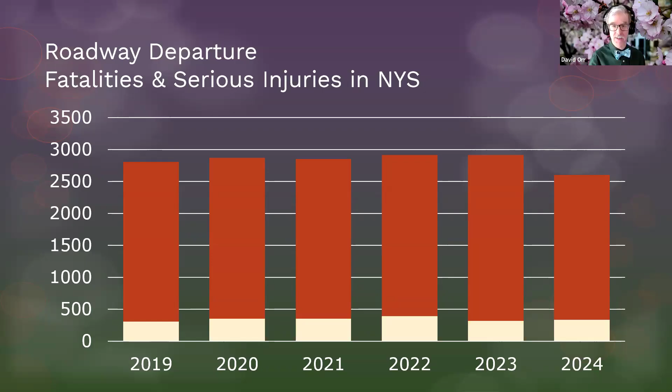Now the roadway departure concept comes around, there's three ideas involved here. We're going to keep the vehicle on the road, okay? That could be done with stripes and keeping the lane widths where we want them, and good signage. We've talked about some of those.

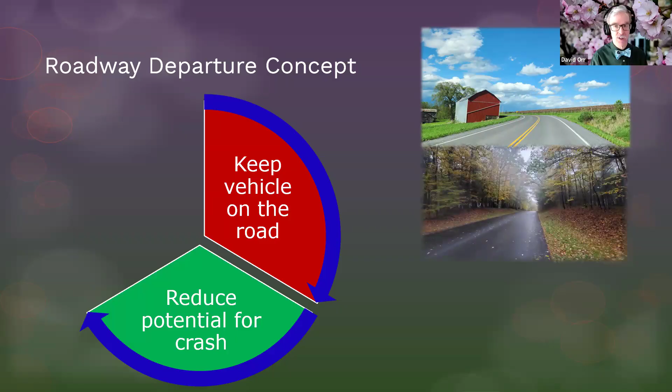We're going to reduce the potential for the crash. We'll have some examples today where if you do leave the roadway, try to keep you from actually hitting something. And then finally, if you do have a crash, make sure that crash has low severity, including things like breakaway hardware and barriers. We'll talk about a lot of those today.

We're also going to talk about local road safety plans for the last bit of this webinar, just because it's such an important characteristic and it's part of the roadway departure local call for projects. If you have any questions about this particular call, make sure you contact the DOT. Andrew Sattinger can answer those questions for you, either a phone call or an email. But really, you want to go look at the web page. There's a lot of very good information there, including some of the data viewers on the plans itself and some of the ones I'm going to mention today.

Now, in terms of the funds, if these funds are being released through the Highway Safety Improvement Program, or HSIP, they're only for local roads. So it has to be a town, county, village, or city road or street. If you're in an MPO, you'll go through your MPO for this, but the key is it's for local roads.

There's $90 million set aside, and 10 million of those 90 million are set aside specifically for developing a local road safety plan, which is why we're going to spend some time today reminding you of some of the aspects there. Now, all of these are due on June 13th, so you've got plenty of time, but you do need to start getting all your paperwork in place, and you need to start getting your costs in place, okay?

Now, in terms of what proven countermeasures are eligible, well, if they're part of the hotspot series that's inside the roadway departure safety action plan, you're golden. If you're part of the emphasis areas in the systemic safety that the state did when they reviewed their own road system, you're in good shape. If you have your own local road safety plan, you're in good shape. And even if it's just a proven countermeasure from the list we've been going over, you're actually okay.

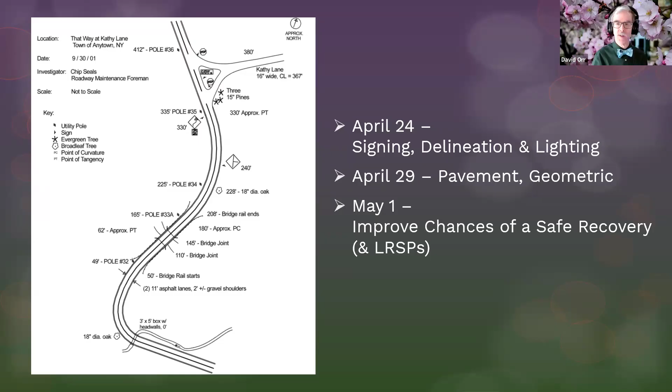Before you do anything, make sure you have a good inventory, whether it's done by an old hand-sketched map like was done by Jim Markle when he worked here, or whether it's done with a GPS and all the fancy tools we have today. I don't care, but have a plan so you can start focusing where the problems are going to be occurring. Now, for each of these different countermeasures, I've gone through and I've sort of marked them out based upon the concepts in the roadway departure concept.

And then what kind of crashes are we talking about? Are we talking about really working on head-on crashes, which we don't like, rollover crashes, hitting fixed objects on the side of the road? And are they more effective at night versus the day? And of course, we also want to look at curves versus tangents. We know curves are a major issue.

You'll see a check mark with the primary. Those get a little higher emphasis, but you may consider any of these things that we highlight, and you may have arguments for going beyond what I'm going to show you.

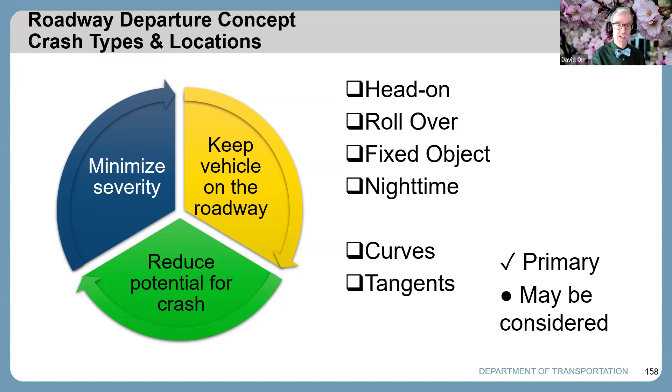So let's get started with breakaway supports. We know they reduce the potential for a crash. They're usually placed inside the clear zone, where they're holding up signs. Even utility poles can actually have breakaway, though we don't use them very often. We know that a lot of light poles are frangible, can be struck. The idea is so we get rid of the idea of a fixed object. We don't make them fixed anymore, and they're much more applicable at curves because people tend to run off the road more at curves.

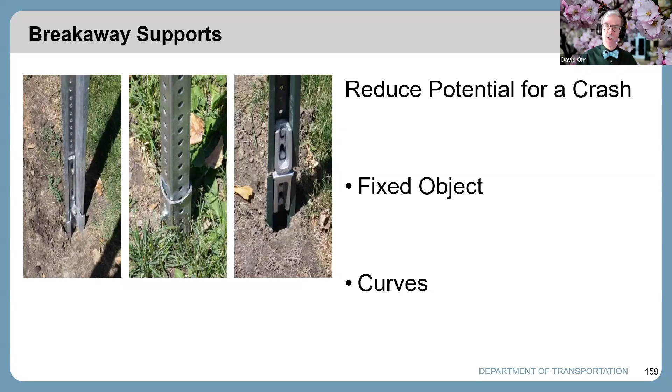So, just to illustrate this, this is a small car. They like to test small cars because that's sort of the worst case scenario. And this is a single post. It's actually a 2-inch pipe. We don't use pipes for a reason, and here's why. Yeah, that's a bad day. That could lead to a serious crash, kind of injuries that are life-changing. Small little car. So we really want to be looking at good breakaway hardware.

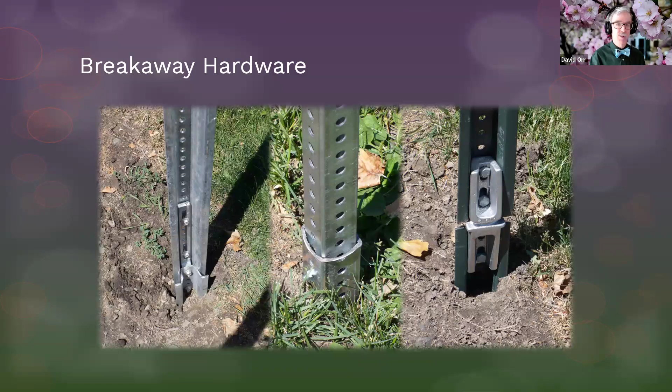Okay, and there's lots of choices out there for breakaway hardware. So I'm just going to ask and get you to raise your hands. Raise your hand if your agency currently uses breakaway hardware regularly. It's in your standard operating procedure. Okay. Good. I'm glad to see you.

That's good. It should be anything you're putting up should be breakaway. There's two reasons for that. One, even on what you think are those low-speed roadways, it can be very effective. Two, it's required on anything 40 and above, based on MUTCD requirements. So, keep that in mind. There are some times when there's requirements involved. It can actually help make it easier to install the signs because you can do the ground post and then apply the breakaway hardware and attach the upper post.

Tons of choices out there. But look at other items on the roadway, not just your signs. Look at your mailboxes, okay? Gang mailboxes are one of the most dangerous things we allow on the side of the roadway. There's good reasons to have a mailbox there, but boy, this car is having a really bad day.

It's that same kind of small car. They go through them and where they test these things. I've seen them in Texas. They're pretty cool to watch. But that'd be a really bad day. Okay, that would certainly be a serious, if not fatal, injury.

Now, if you're wondering about mailboxes, what you can do, they actually make a support for the mailbox that comes out. It's got this sort of teardrop shape to it. And then if a vehicle hits it, it actually flops on the hood and pushes off to the side. It's actually very effective at keeping it from getting into even a small car. So that's something you might want to think about requiring for mailboxes. Don't let people put those fixed object mailboxes. Nice brick looks nice, but boy, it can get you in big trouble.

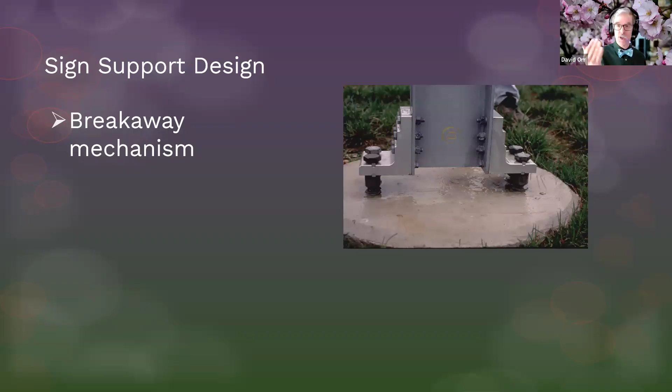Make sure you've thought about the design of the sign support. What is the breakaway mechanism itself? You can go high end. This is actually for a really large one on the interstate, which has a hinge system usually with it. A lot of times there's a hinge that goes up partway, so a vehicle literally goes under it. I'll show you a video of that in a couple minutes.

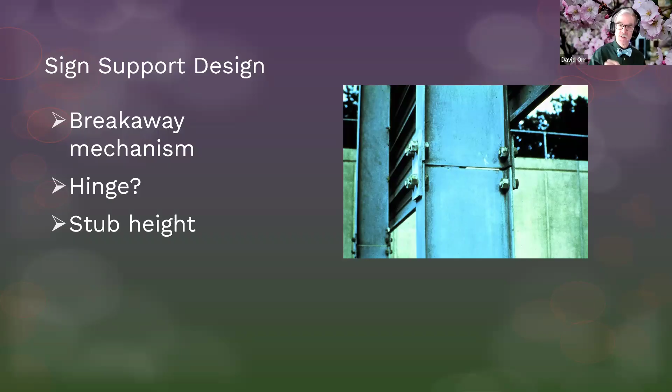Think about the sign support, think about the stub height. The maximum height something should be above the ground for a stub is really only 4 inches, and that's over the length of the car, so it's really 4 inches over 5 feet. If you've got a stub above the ground, that stub could still snag a vehicle as it drives along.

These concrete anchors are too high. They put in a nice breakaway system, but if somebody were to drive down and hit this, and it'd be very likely because it's right in the ditch line, they hit those, they're actually going to have a problem. They can actually be more dangerous than if they hadn't anything at all. So think about your stub height, nothing above 4 inches, okay?

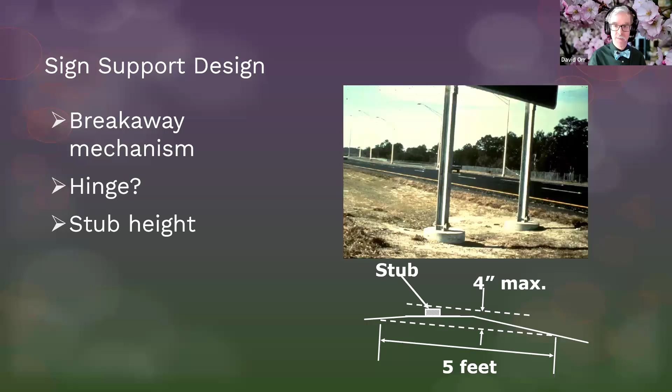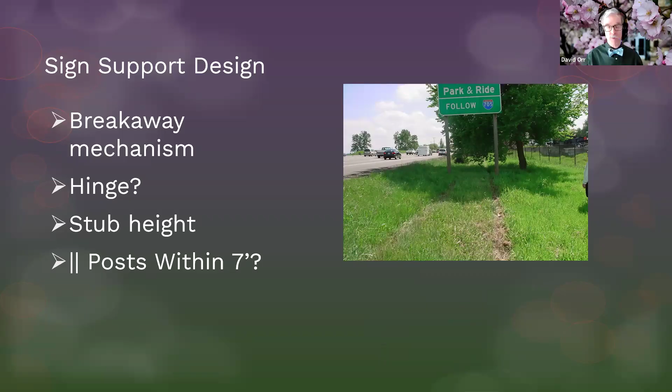If you're putting up a posted system, let's compare a wooden post. If they're closer than 7 feet apart, you may need to think about your breakaway hardware. There are standards and requirements for this. If you've got multiple posts, be very careful about things that are essentially a vehicle hits both posts, it's a lot more dangerous than if they only hit one. Keep those things in mind.

So I'm going to have you put it over into the Q&A for me. What issues do you see here? Give me, what do you see the problems here? There are actually three that you might put in there. We'll see if you catch two of them.

The ground posts are way too high. Yeah, that's the easy one, everybody should get that. Let's see if you catch the other one. The bolt spacing, yes, too many bolts. It's actually not breakaway hardware. Breakaway hardware usually consists of two bolts or a strap system that are specifically designed to handle being hit.

In fact, I'm going to go back and show you. You can see the one on the left is a strap system, the one in the middle is just a single bolt system, and the one on the right is a shearing device. There are specific standards that are out there.

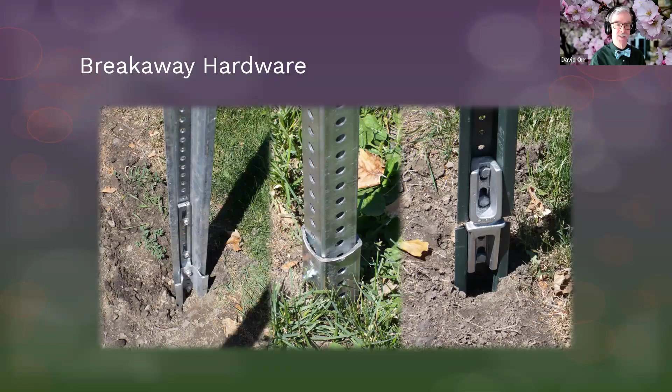Something called MASH, and we'll come back to MASH in a little bit. But yeah, you guys did a good job. By the way, the last one, you might be able to use one post. This particular picture, it doesn't show, but this is actually facing against traffic, you could have a problem. If it's facing with traffic, that's okay. You want the post to fail in a particular way. And of course, the post spacing is way too close to each other in a lot of ways. So be careful about these kind of things.

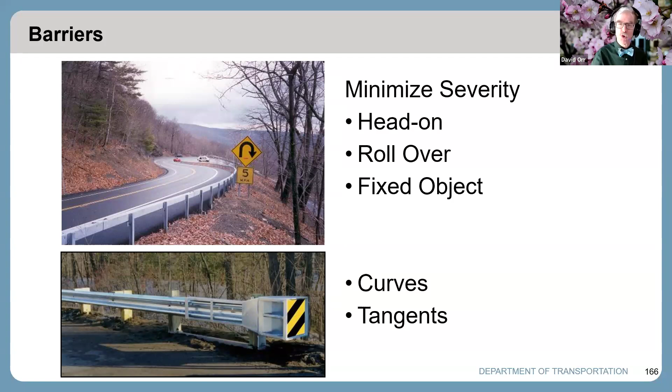Now I want to spend a good bit of time on barriers, i.e. rail systems. The goal here is we're trying to minimize the severity of a crash that does occur, so we want to reduce the head-ons in some cases. It actually can help if you do it right, and we'll show you why in a minute. It can certainly help with rollovers and fixed objects, and the terminal ends are absolutely critical. We know they work on both curves and tangents.

So a pretty easy one, I'm not even going to ask you to raise your hand. I think everybody can agree that this is a location where you need guide rail. It would be really hard to do the other steps involved to get rid of the need for guide rail. But let me ask you here, raise your hands, do you think you need guide rail here? Do you think there's something else you could do instead?

Relocate the object. You can't do that with the culvert, but maybe you could move that utility pole if it was too close to the roadway. You could reduce the impact severity - that's where we were talking about the breakaway systems that are out there. And then, and only then, should we think about shielding things.

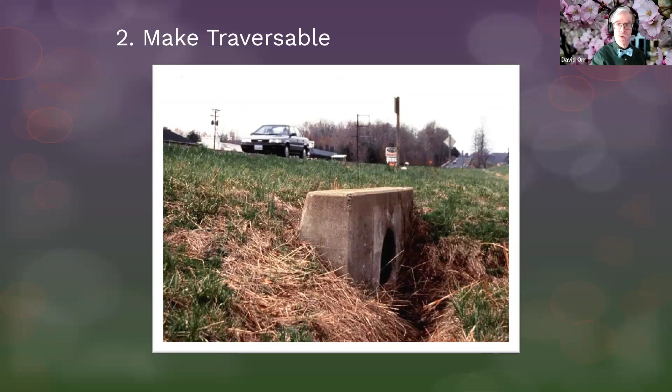This is definitely not a traversable end - this is way too high. If you were to have that flush with the ground, it might even be removed completely if you had it short enough. But make it traversable.

Now, we talked about slopes last week - we know how difficult that can be, especially with right-of-way issues. But, excuse me, Tuesday, I'm getting my days all mixed up. But think about making things traversable.

Any culverts you've got, especially your driveway or even cross culverts, you might want to think about putting something where people could at least drive up and over it. If they went down this ditch and hit this rail and this rebar grate, they're probably going to have a property damage crash. They may even have a minor injury, but they'll roll up on top and therefore they'll at least have a minor injury at most.

So you'll want to think about that for especially your cross culverts and even your driveways. Anything that's above 36 inches, and you've got a flared end that's over 36 inches, you're going to want to think about doing something to make it traversable.

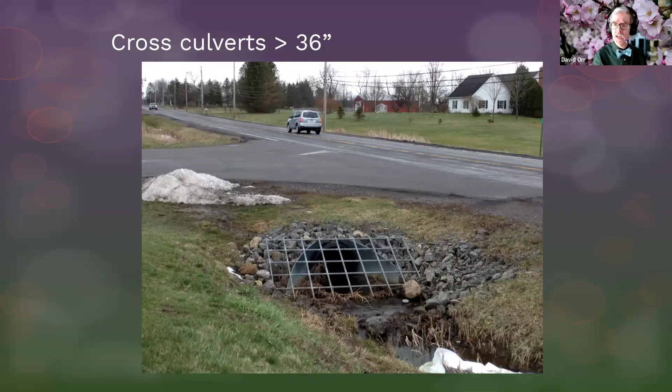If you do have to have something in the clear zone, like mailboxes or signs, make them crash worthy.

We've already seen the single vehicle hitting a single post, but think about what other things you can do. That's why we're a big fan of looking at breakaway hardware. There are lots of choices out there, and like all of these proven countermeasures, there's a lot of overlap.

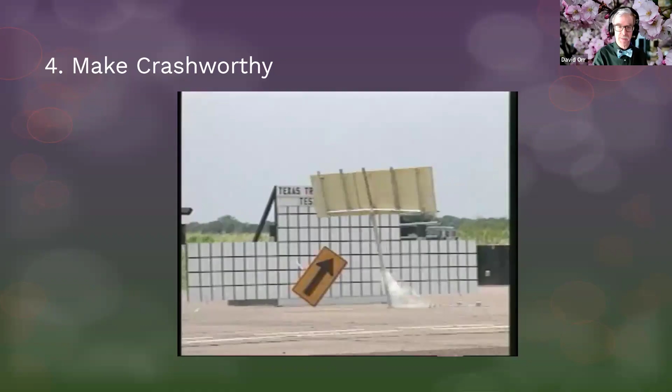Here's a successful slip base test. Now, I don't see a lot of slip base on the local road system, I understand that — this is more of an interstate level kind of thing. But if you've got high volume, high speed, you might want to think about it. A simple system, a single bolt or two bolt system, in this case U-channel — see, it did its job.

Though in an urban area, I like the strap systems, because you don't get a flying sign.

Now, in terms of hardware testing, both for rail systems and breakaway hardware, we used to use something called NCHRP 350. You may have read about that, but it's been superseded by MASH, the Manual for Assessing Safety Hardware. It first came out in 2016, and I know they're working on updates to it. The key is there are new testing requirements — slightly bigger SUVs, small cars are still small cars, and more angles, more speeds to make sure things are safe.

Now we're going to talk about shielding — we're only talking about shielding now. We try to do everything else first, and we'll come back to talk about specific rail systems in a minute. But shielding is after you've checked and looked at everything else. And if you can't do that, you're going to want to delineate, but make sure the delineation is pointing in the right direction.

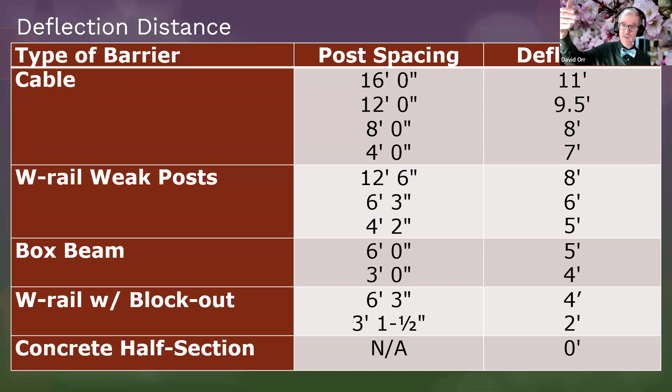You can get the deflection from 11 feet down to 0 feet. Okay.

But just ask yourself, I'll bring the chart right back up, and I'm going to start a poll here. What is the minimum deflection distance for W rail weak post? Okay, I'll let you put those answers in.

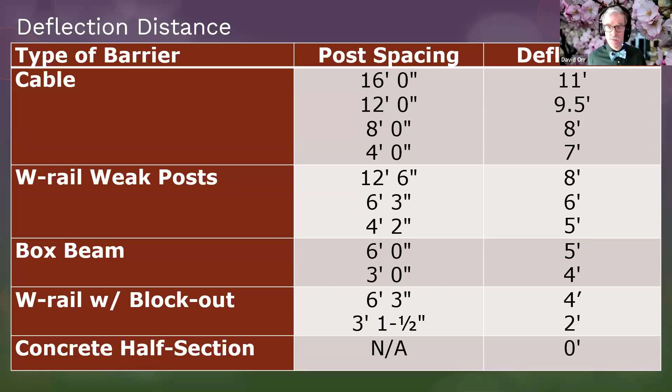And hopefully, yay, everybody got 5 feet.

Somebody asked in the Q&A, how are standards changing given larger, heavier vehicles and heavy EVs? The larger, heavier, that's actually already incorporated to some extent in MASH. That takes care of quite a bit of it. These rail systems can actually handle buses and trucks. They're actually testing for some really large vehicles. The biggest issue we're going to see with the EVs is probably going to be with cable systems. They may have to retest those. The standards haven't changed yet, but there may be some changes because of lower center of gravity, and the cable systems aren't interconnected. But the heavier, I wouldn't be as worried about.

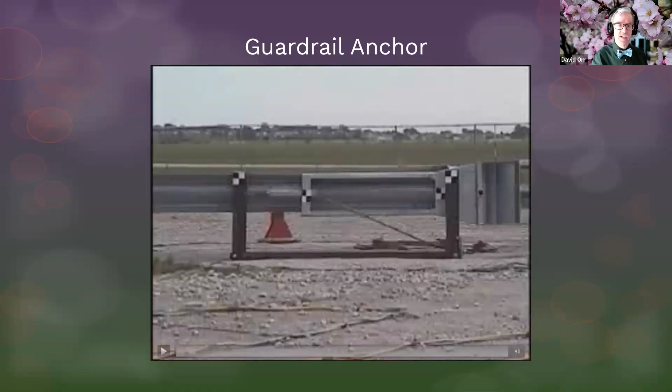And those end treatments can be energy absorbing. They can be the kind that fail when it hits within a certain distance. The anchoring is absolutely critical. We don't want those old spears out there. Now, if you look carefully, watch when the vehicle hits. If it hits beyond that second post, that combination of hardware actually means everything beyond that point works.

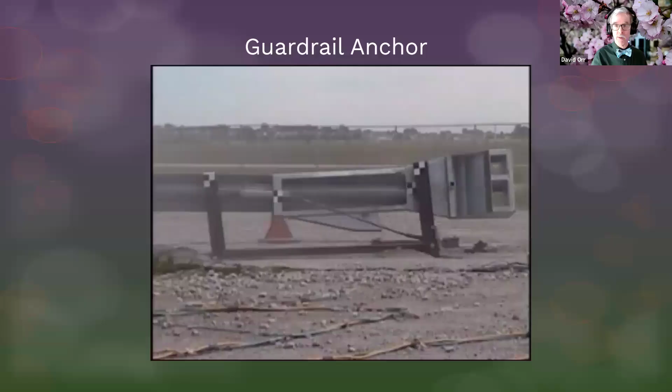Okay, now you can see there's a lot of energy involved. You're going to have to fix things, but that rail system is doing its job as a big rubber band for that truck that hit it. And those guide rail anchors, well, they really work.

But the terminals really do matter. The transitions matter.

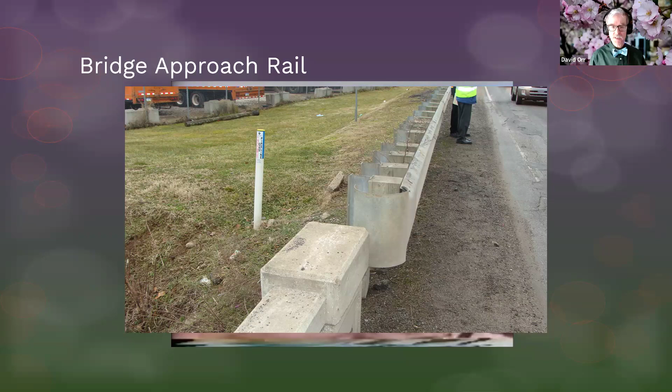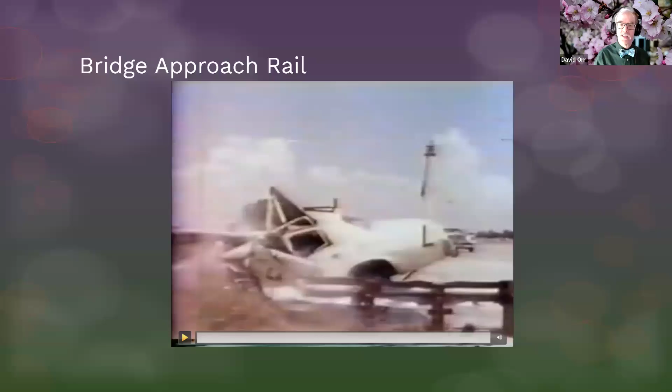So you want to think about upgrading your hardware. This would be a perfect opportunity, and it is a proven countermeasure to improve your transitions. Make sure your bridge approaches are right. Get rid of old, antiquated hardware. Put up proper barrier systems.

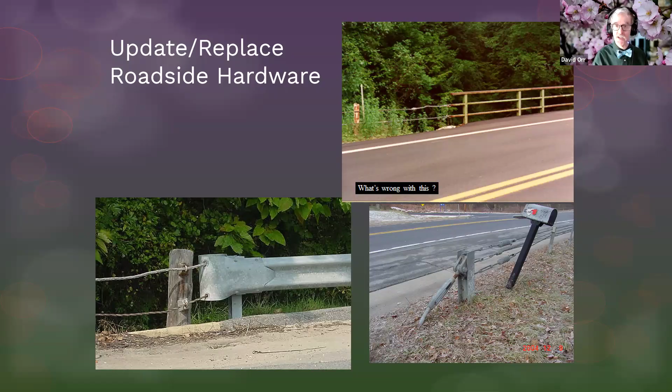So let's ask you a couple of times, and then we'll move on to local road safety plans. What would you do here? I'm going to open up a poll, and I'll leave a picture on the bottom right to remind you. What would you do in this particular case? I can think of about 3 or 4 things you might want to think about.

Absolutely, replace that boxing glove terminal. You might need to remove some trees — there might be trees within the deflection distance. You might need to extend the rail, you might not. Obviously, for a single photograph, it's really hard to know exactly what to do. But as a minimum, a proper end, you may need to upgrade and check the deflection distance. Whether you use an energy absorbing system or a breakaway system depends on the site, but these are things you might want to think about.

You might want to flare it back and offset it a little bit. Again, think about it. Oh, I like that — reflective tape. They actually make delineators for rail systems. As a minimum, you can always add delineators to the rail system itself.

If we go back a picture, you can actually see in the distance there's a curve, and the rail going around the corner — delineators in the rail system can really help. If you put those in, make sure they're put in properly, because they can actually change some of the deflection characteristics and how the breakaway systems work.

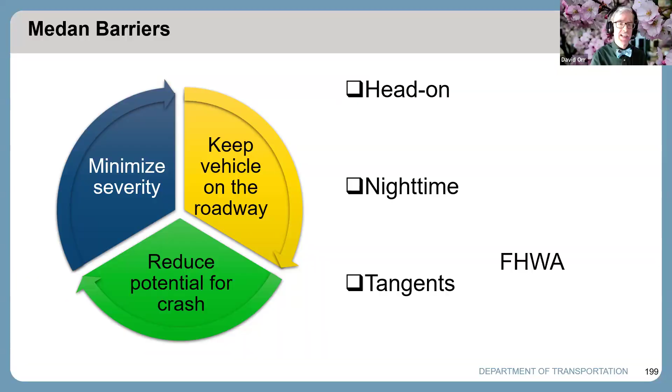It's really good at head-ons, obviously. I doubt very many of you have them, but if you do have them or you're thinking about it, one of the reasons they're a proven countermeasure is 8% of all fatalities on divided highways occur due to someone crossing over. If you put in a proper barrier, you get a 97% reduction — a CRF of 97%, a crash modification factor of 0.03. In other words, you pretty much get rid of almost all the serious and fatal crashes.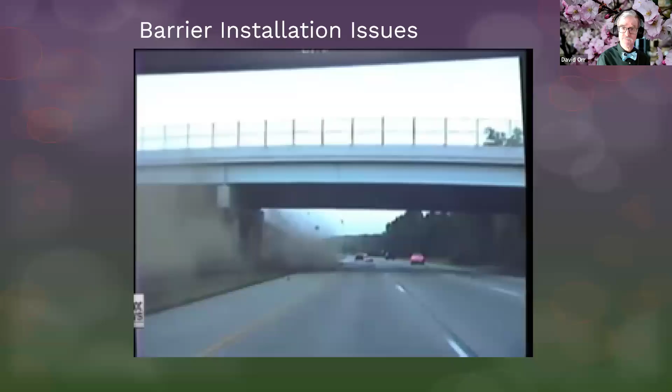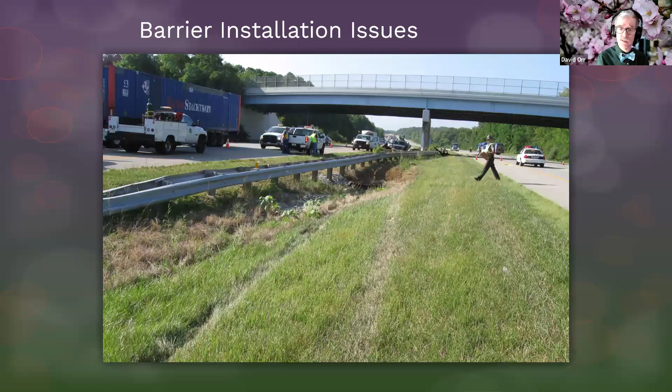Now, while there was a bit of an installation issue, this is an example of why we really like the Safe System approach. Redundancy matters. That person who came and launched themselves at over 100 miles an hour survived with serious injuries. But because of the redundancy, they got quick post-crash care, and they were okay.

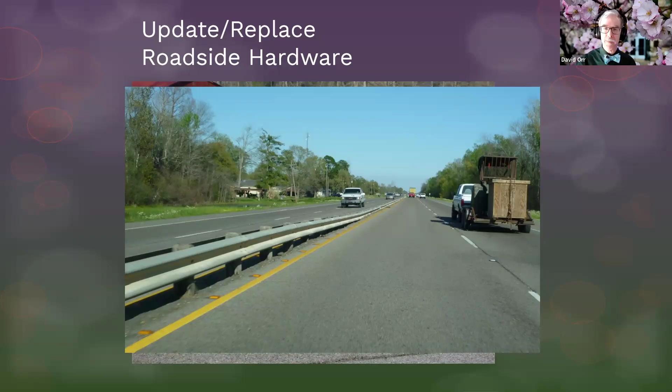Okay, after obviously some time in the hospital. Now, if you do have median barrier, the main thing is you've got to maintain it. In fact, this is true for barrier anywhere. It's got to be at the right height to do the job. This rail is so low, it's had so many overlays on this roadway that it could actually make things worse.

So again, whether it's a barrier system on the side of the road or a median barrier, you might want to think about upgrading your hardware. Now, what I want to spend the rest of our time on, except for the conclusion where I talk about the money, is local road safety plans. Absolutely critical.

So let me ask you, I'm going to make sure everybody's hands are lowered. How many of you have a local road safety plan? Raise your hand if you have a local road safety plan. It may not be just your agency. It might be one for the whole county. It might be a bunch of you together, but raise your hand if you have a local road safety plan.

Okay, well, that's good news for me and bad news. It's an opportunity you should avail yourself of. Absolutely, you want to have a plan. It reduces your liability. It makes you more eligible for other grants, and I'll actually be talking about another grant as well towards the end of our time together. So you absolutely want to have a local road safety plan. And it really covers the whole gamut, not just of roadway departures, but also intersection issues, pedestrian and bicycle issues. And if there's additional funds out there, you'll be more eligible for them.

The steps are pretty easy. We actually did a whole one-hour webinar back last fall, and yes, it's recorded and on our website. But you're going to identify your stakeholders, use data to develop your risk factors, and choose proven solutions. That's why there's those proven countermeasures that we've been talking about. Now, the key here, and this is maybe the single most challenging part, is once you develop that plan, you have to implement it.